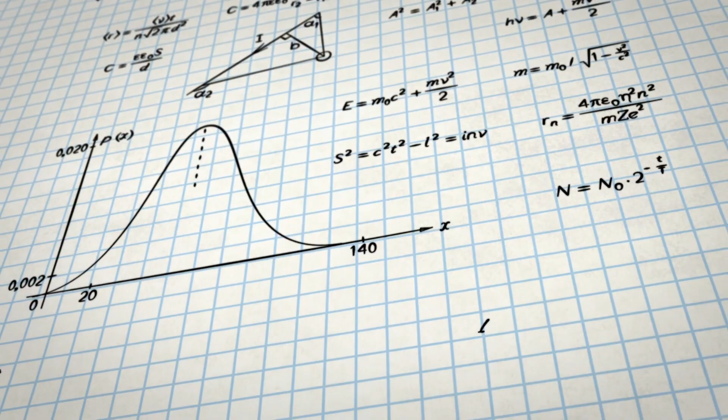As promised, today's video will delve into a detailed discussion on estimating the required fire flow. Impact on distribution system design. The choice to supply water for fire protection necessitates a utility to thoroughly factor in fire flow requirements when sizing pipes, pumps, and storage tanks.

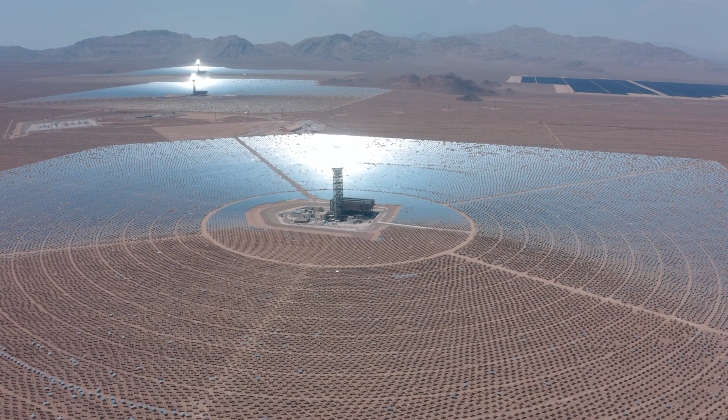While in larger systems, fire protection has a marginal impact on sizing decisions, in smaller systems, these requirements can result in a notable increase in the size of various components. Overall, the influence of providing water for fire protection varies, with minimal impact on the substantial components of major urban systems and a significant impact on smaller distribution systems.

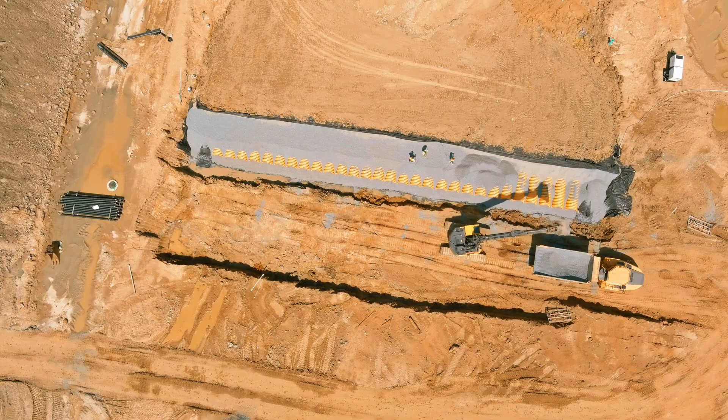The most notable impacts include the installation and upkeep of fire hydrants, ensuring sufficient storage capacity, and adhering to minimum pipe size requirements in neighborhood distribution mains when smaller pipes would suffice for delivering potable water only. While these requirements streamline the design of distribution systems for engineers, they also incur higher costs for the water utility. Additional impacts encompass the need for extra treatment capacity at plants and increased pumping capacity at pump stations.

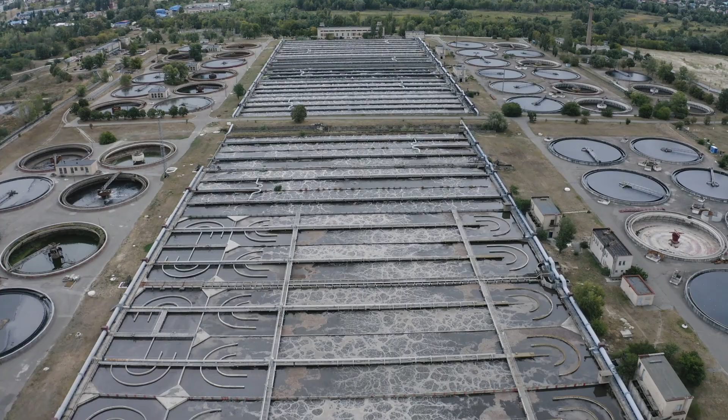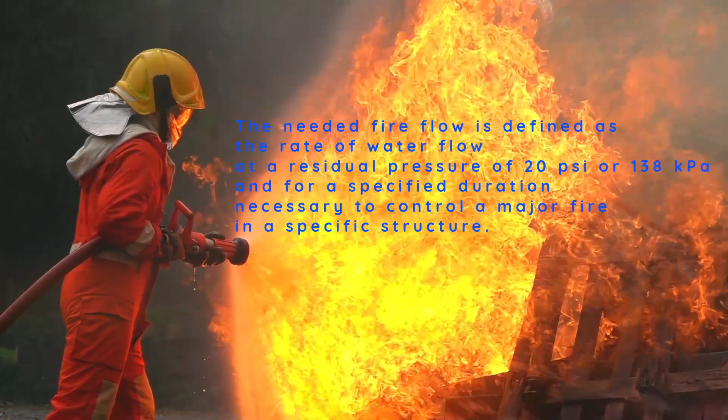Fire flow requirements. When formulating a fire protection plan, the governing body must initially adopt a well-documented procedure for determining the fire flow requirement. Essential to ensuring an adequate water supply is defining how much water should be made available for various scenarios. The needed fire flow is defined as the rate of water flow at a residual pressure of 20 psi or 138 kilopascals and for a specified duration, necessary to control a major fire in a specific structure.

A comprehensive definition of needed fire flow entails determining both the required flow rate and the total amount of water needed to control the fire. The rate of flow and the duration of flow required can be specified by the simple equation here. Quantity equals rate multiplied by the duration of flow.

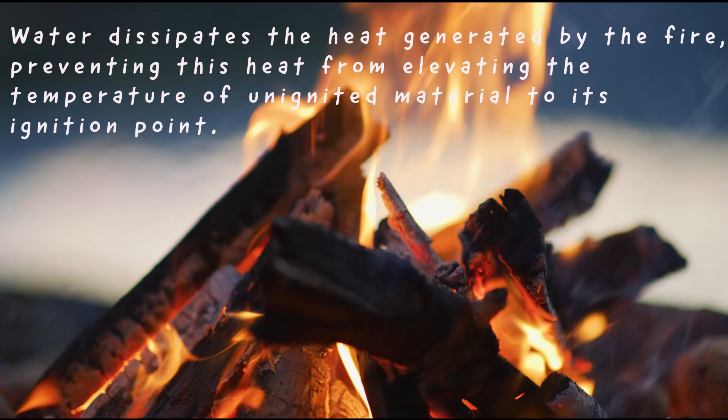Recognizing the significance of both flow rate and total quantity is essential in comprehending how water is employed to extinguish fires. The application of water in firefighting serves two primary purposes. Firstly, it dissipates the heat generated by the fire, preventing this heat from elevating the temperature of unignited material to its ignition point. As water transforms from a liquid to a gaseous state, it absorbs the fire's heat, releasing it

as steam. Secondly, the portion of water not converted to steam by the fire's heat remains available to cool materials that have not yet ignited. Additionally, water acts as a blanket over unignited material, restricting the oxygen necessary for combustion initiation and sustenance.

Calculating needed fire flow. Every fire is inherently unique due to unpredictable variations in the structure and contents of the burning building, exposures, defined as the configuration of adjacent structures not involved in a fire but that are to be protected to prevent the fire from spreading, weather conditions, temperature, and the duration of the fire. Consequently, various methods have been suggested to ascertain the adequate amount of water needed to extinguish a fire.

In this video, the method developed by the Insurance Services Office Incorporated, often known as the ISO method, will be discussed. Insurance Services Office Method. The ISO method is documented in its publication, Fire Suppression Rating Schedule. The term used in that document to describe the fire flow requirement is needed fire flow, or NFF.

The NFF represents the required flow rate to control a major fire in a specific building for a defined duration. Its purpose is to evaluate the adequacy of a water system, forming a component of an insurance rating schedule. While not intended as a design criterion, it has been demonstrated that the NFF reasonably aligns with the actual flow required to suppress a fire in real-life situations.

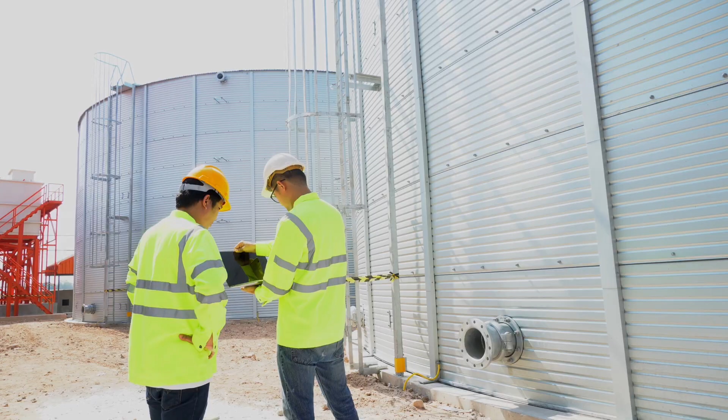A water supply should have the capacity to deliver the maximum NFF within its distribution system area. When designing a new water distribution system or implementing improvements in an existing one, it is common practice to accommodate the NFF within the design area. However, it is uncommon for an existing water distribution system to be capable of meeting every NFF within its service area.

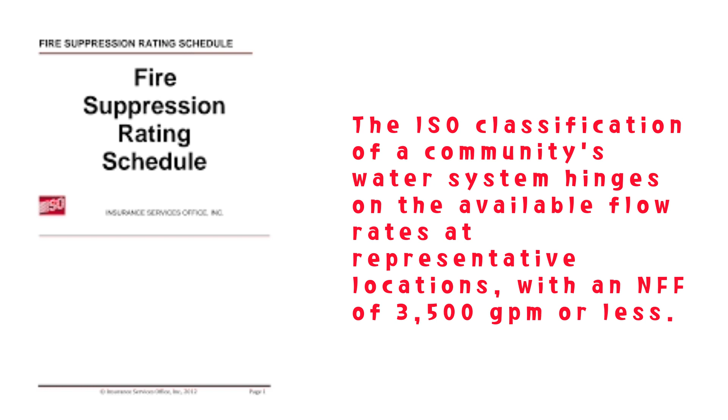The ISO classification of a community's water system hinges on the available flow rates at representative locations, with an NFF of 3,500 GPM or less, as determined by its fire suppression rating schedule. Private and public protection at properties with larger NFFs undergoes individual evaluation and may deviate from the community's classification.

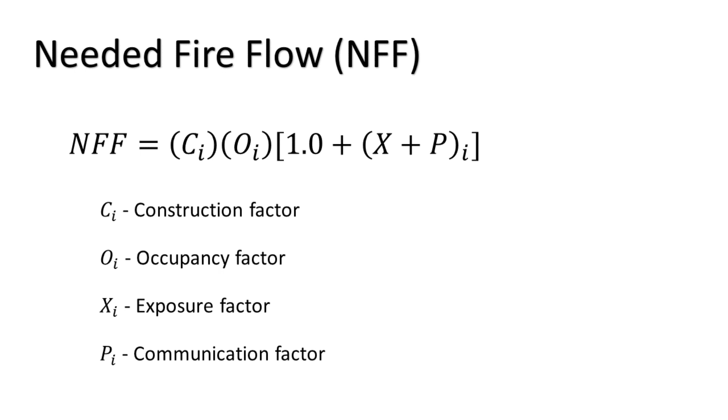The computation of a NFF in gallons per minute for a subject building takes into account its construction factor C, occupancy factor O, exposure factor X, and communication factor P, as delineated below. Construction factor, C: the segment of the NFF assigned to the type of construction and the area in square feet of the subject building is calculated using the following formula.

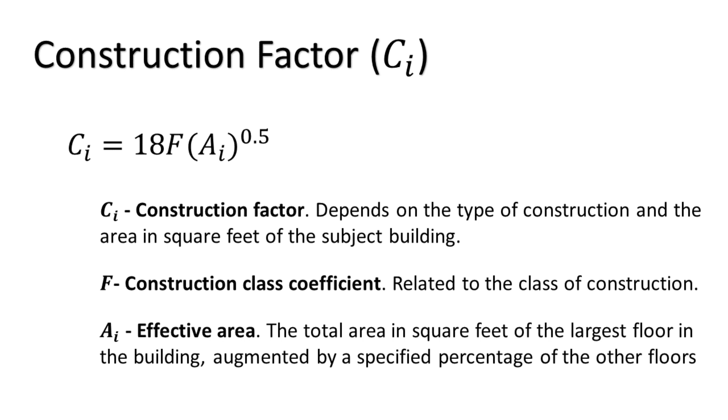For buildings of construction classes 5 or 6, provided that all vertical openings in the building have 1 hour or more protection, it consists of 25% of the area, not exceeding the 2 largest floors. The doors must be automatic or self-closing, labeled as Class B fire doors that provide 1 hour or more protection. In other buildings, it involves 50% of the area, not exceeding 8 floors.

The upper limit for C is constrained by the following: 8,000 GPM for construction classes 1 and 2, 6,000 GPM for construction classes 3, 4, 5, and 6, and 6,000 GPM for a single-story building of any construction class. The lower limit for C is set at 500 GPM. The computed value of C should be rounded to the nearest 250 GPM.

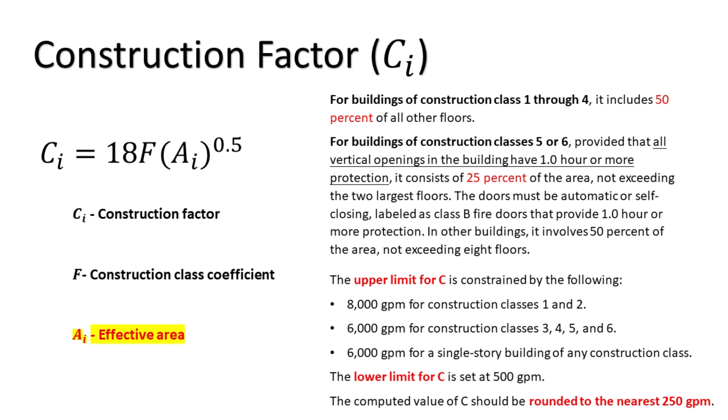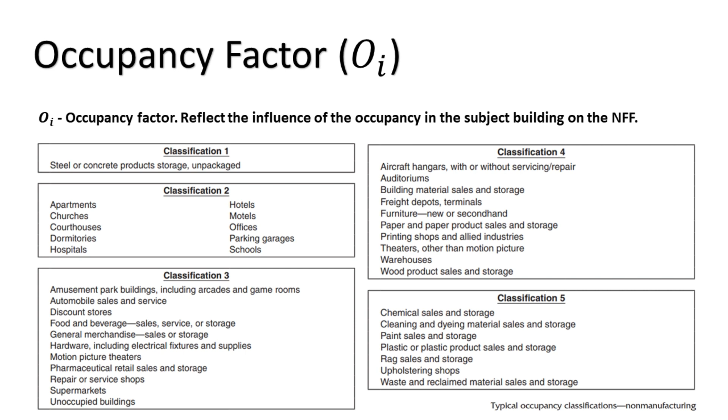Occupancy factor, O. The occupancy factors, given in the table here, reflect the influence of the occupancy in the subject building on the NFF. The figures here have provided representative lists of occupancies by combustibility class. Exposure factor X, and communication factor P. The exposures and communication factors reflect the influence of exposed and communicating buildings on the NFF. A value for X plus P shall be developed for each side of the subject building as shown in the equation here.

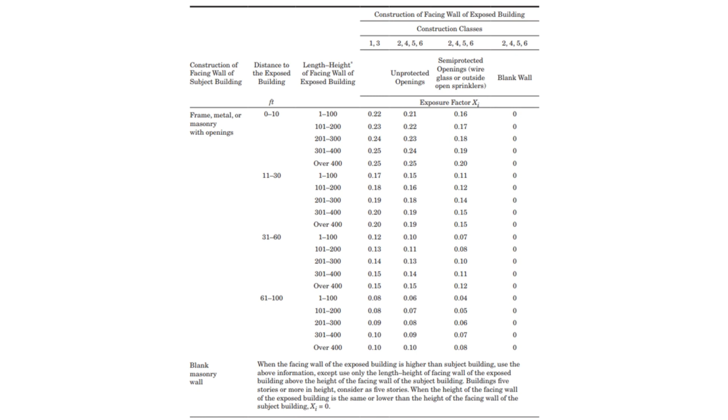The exposure factor X depends on the construction and length-height value of the exposed building and the distance between facing walls of the subject building and the exposed building. The length-height value is calculated using the length of the wall in feet times height in stories. This factor should be selected from the table listed here. When more than one exposure side exists for the subject building, apply only the largest factor X for that side. When there is no exposure on a side, X equals 0.

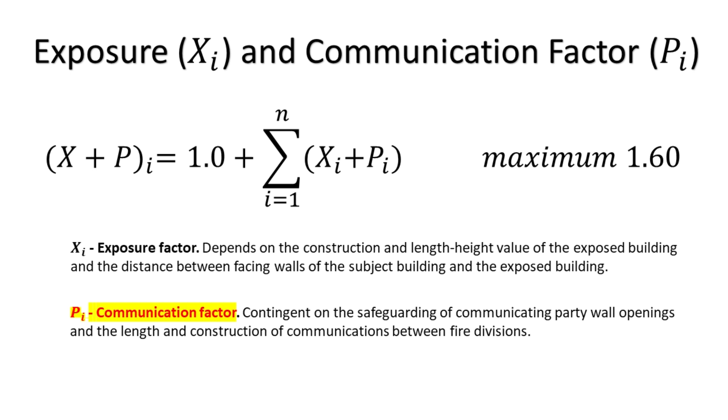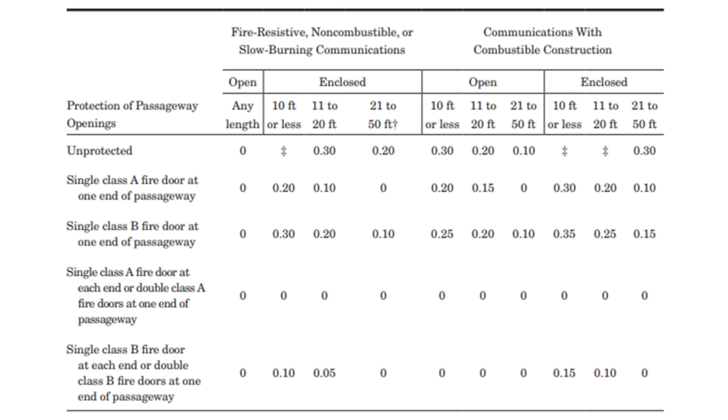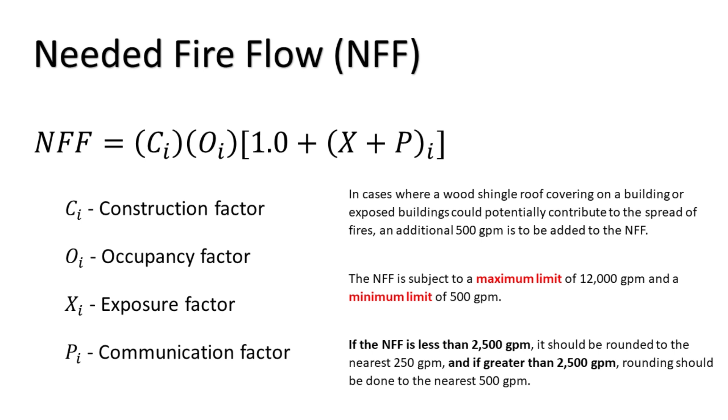Needed fire flow. The calculation for NFF follows the equation listed here. In cases where a wood shingle roof covering on a building or exposed buildings could potentially contribute to the spread of fires, an additional 500 GPM is to be added to the NFF. The NFF is subject to a maximum limit of 12,000 GPM and a minimum limit of 500 GPM. If the NFF is less than 2,500 GPM, it should be rounded to the nearest 250 GPM, and if greater than 2,500 GPM, rounding should be done to the nearest 500 GPM.

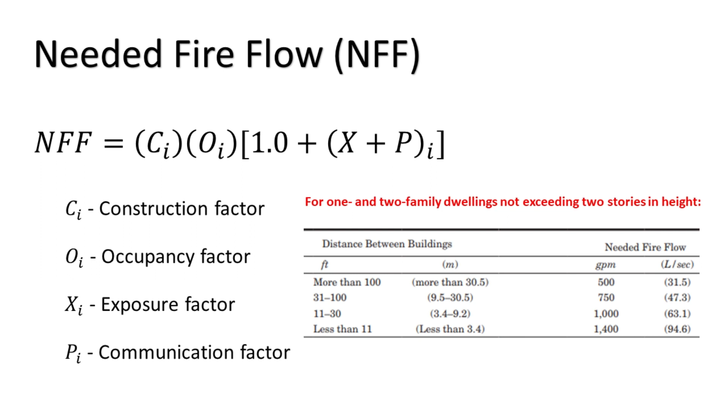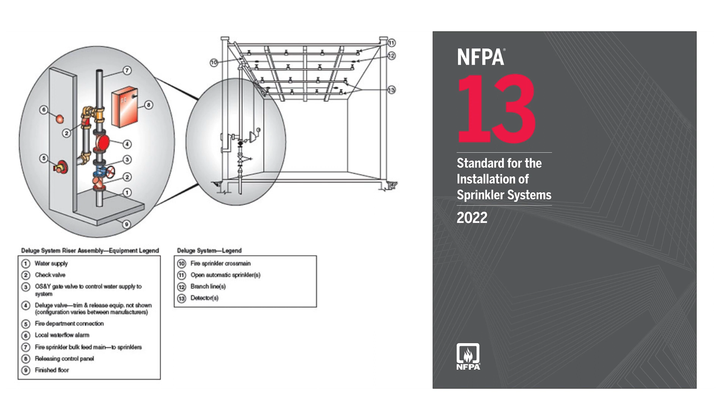For 1 and 2 family dwellings not exceeding 2 stories in height, refer to the NFF values listed in the table here. In the case of habitable buildings not covered by this table, the NFF is capped at 3,500 GPM at maximum. For a building equipped with automatic sprinklers, the NFF should account for the sprinkler system's requirements plus hose streams converted to 20 psi or 138 kilopascals residual pressure, with a minimum of 500 GPM. Detailed specifications for sprinkler water requirements at the base of risers can be found in the National Fire Protection Association Standard Number 13.